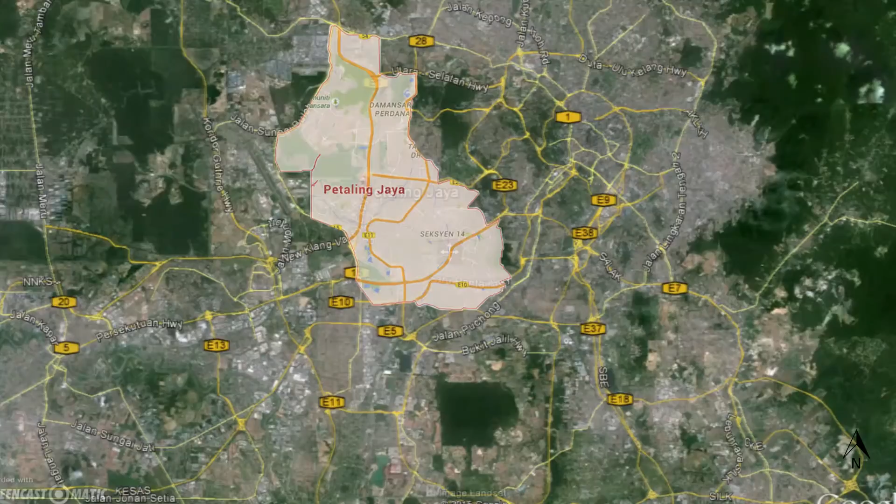Petaling Jaya, better known as PJ, is one of Selangor's earliest developed townships, surrounded by the Malaysian capital Kuala Lumpur to the east, the Gombak district to the north, the capital of Selangor Shah Alam to the west, and Subang Jaya to the south. PJ was naturally a strategic township enjoyed by both locals and visitors.

Taking a trip down memory lane, PJ was initially made up of PJ South, from Section 8 to PJ Old Town, which were established around 1953.

As Malaysia soon gained independence and started developing, the government initiated the New Town Development Projects as an initiative to improve unfriendly urban and dwelling environments.

The British urban development system and legislation was adopted into PJ, and PJ then became the first new town in Malaysia designed in accordance with British town planning principles, based on the model of a modern-day ideal city. Being such a valuable and desired location, it is hard to believe that an approximate 100 meters by 60 meters plot of land was left empty.

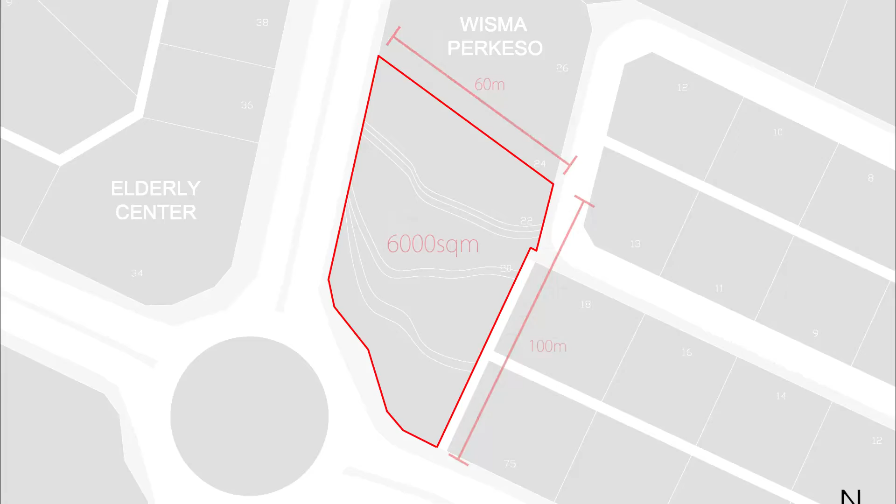To fully utilize the site to its fullest potential, necessary site info and data were collected and analyzed.

Sunpath was studied, as light and shadow play a huge role in building design orientation. Wind direction and intensity was also studied to aid passive design strategy.

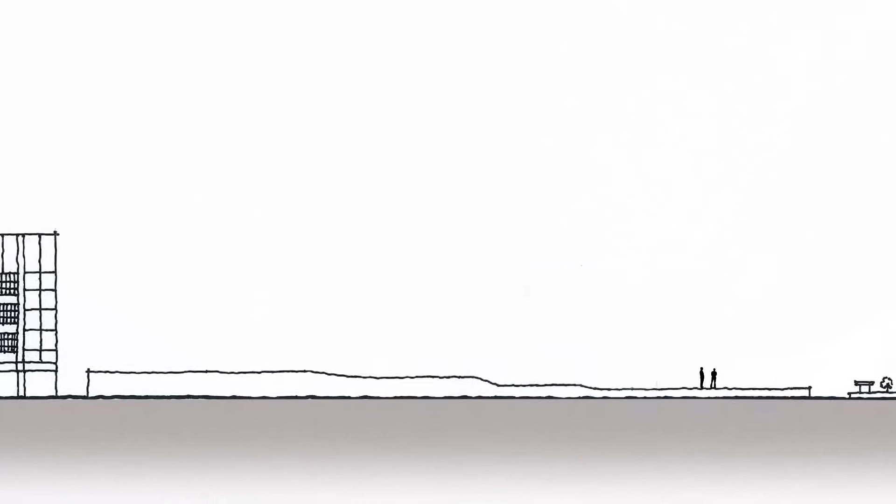Besides, the landscape itself is especially interesting as it generally has three major contour layers and possesses numerous lush and mature trees. The following trees are as follows.

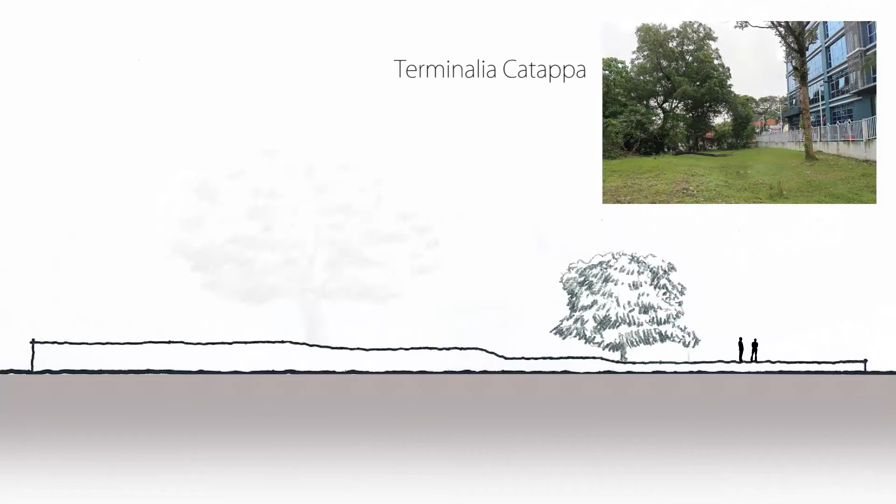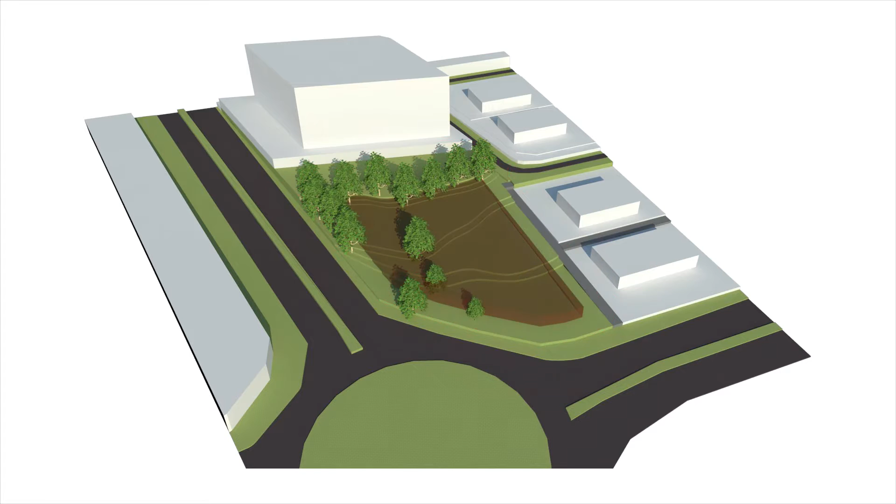According to UBBL, the building built on site must comply with a 6-meter setback on all sides. On top of that, the height of the building is also restricted to a limitation of 5 stories.

Around the site, renowned landmarks such as Assunta Hospital, Rakan Muda Complex, MBPJ Tower, UiTM, Masjid Jamek, Wisma Pekeso, SMK Assunta, and PKNS Tower are easily identified.

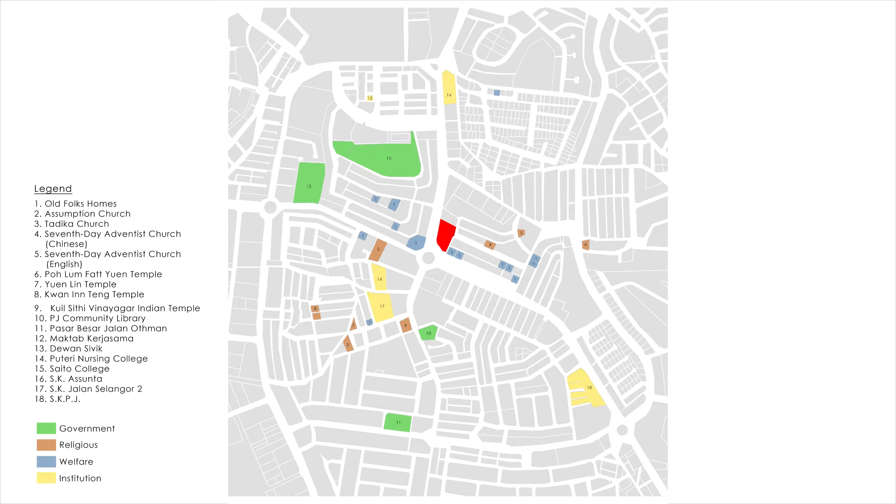Alongside these major landmarks, numerous elderly centres, schools, churches, temples, and a community library are found. All these establishments have brought about many perks and opportunities for the locals and livened up the township as a whole.

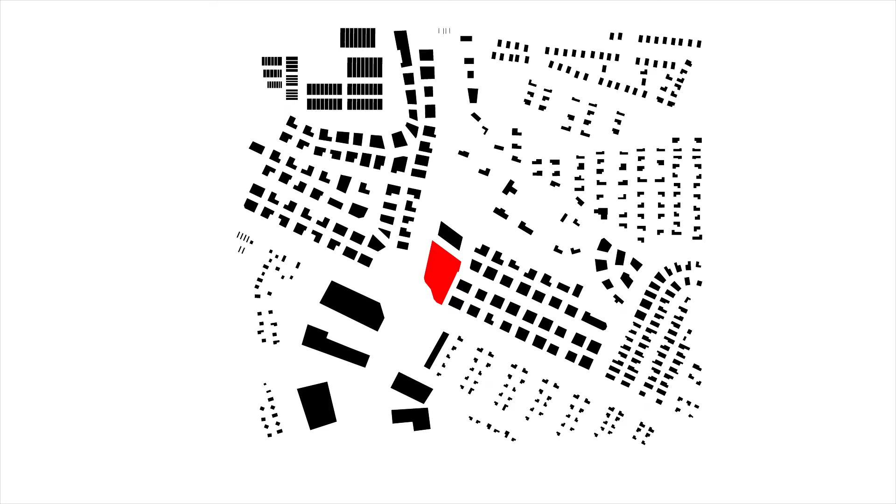Also, based on the figure ground diagram, we can see there are various voids in the area. Most buildings have extra land around them and can be considered a fairly spacious and comfortable township to live in, compared to busy urban cities like those in KL.

With all these facilities and attractions, it has definitely contributed to the traffic and affected the circulation of the area. The main circulation is primarily taken up by motorists coming from either the Federal Highway or the New Pantai Expressway, both leading towards the city centre, Kuala Lumpur.

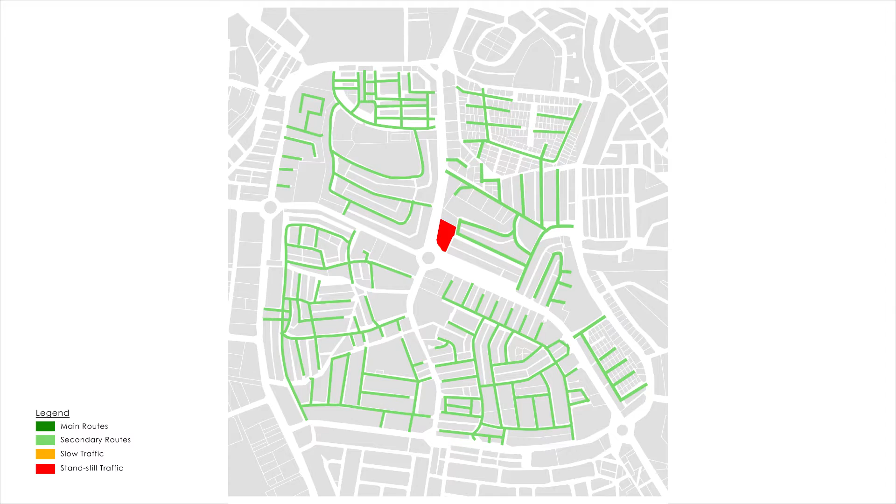Secondary circulation, on the other hand, is taken up mostly by the residents themselves, as schools, mosques, churches and temples are present. As can be expected, the traffic in the area isn't ideal and is frequently complained about by the residents of PJ.

At peak hours, 7:30 to 9:30 am and 5:30 to 7:30 pm, the traffic is often slow moving and sometimes even at a standstill.

On the contrary, the human circulation in the area can be taken as favourable, as proper walkways are available and the landscape is well taken care of. Residents do not mind using the walkways and are also not afraid to fully utilise the inner roads which form the secondary circulation.

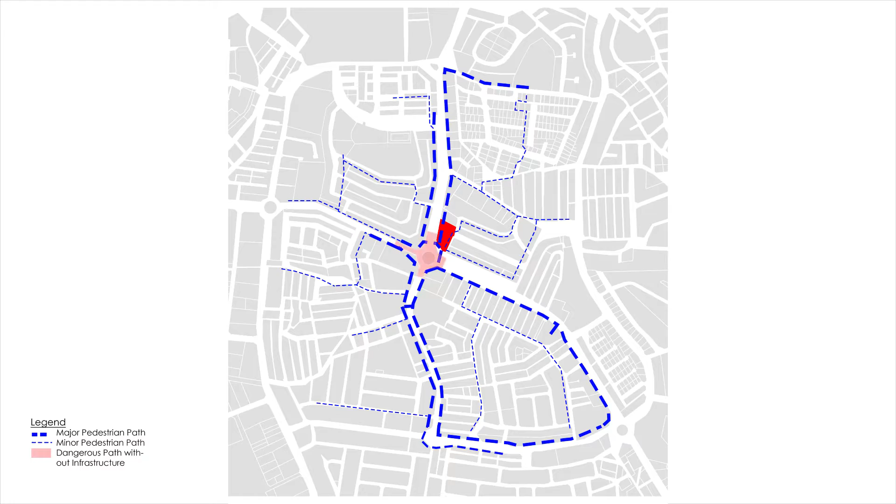The area can be said to be a relatively safe neighbourhood, as crime rates are moderate, as told by the residents. In fact, the danger doesn't come from the crime rate but the lack of infrastructure, highlighted in the danger zone where pedestrians jaywalk their way through the busy main streets and roundabout.

Besides that, there are also several transportation options available on site. Taman Jaya LRT station can be found along the Federal Highway, whereas two more KTM stations can be found along the NPE Highway, namely Kampung Datuk Harun Station and Jalan Templer Station.

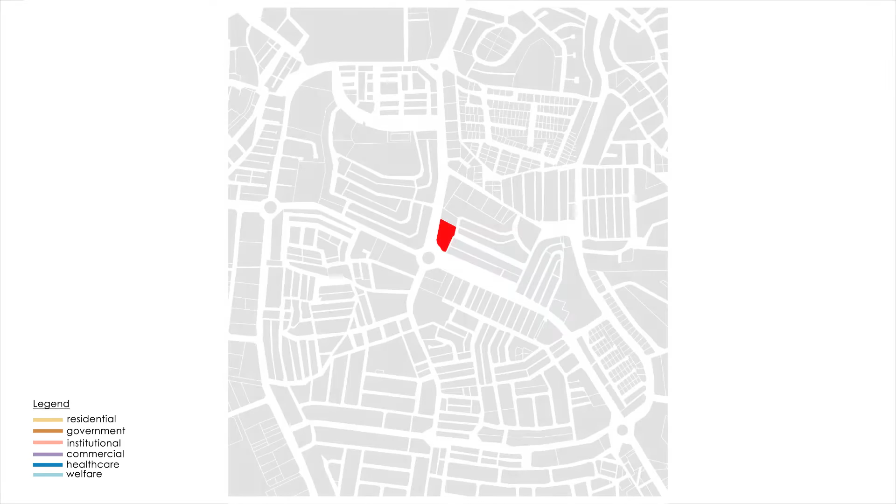MBPJ has also taken an extra step in providing a free community bus to better the existing public transportation services. With that said, through an analysis of the landmarks and human circulation, the nodes are identified, edges are formed, and districts are marked.

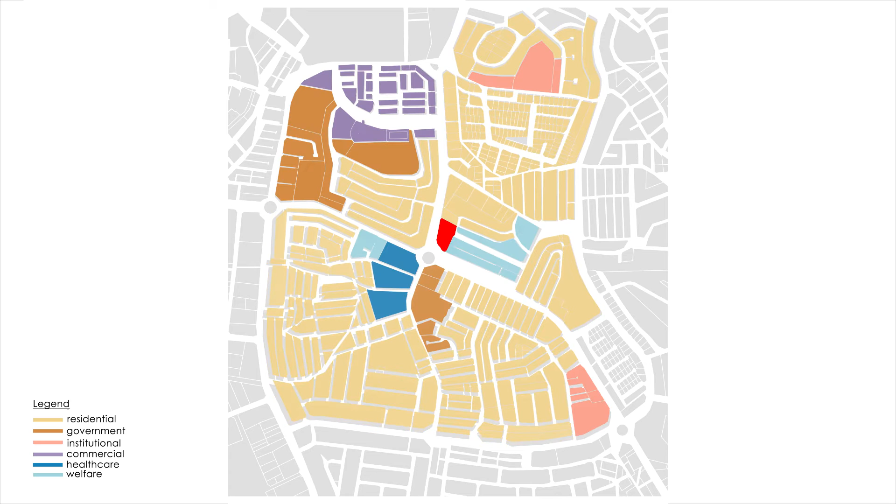Besides being strategically placed, the site is blessed with a diverse community, expressive lifestyle, and eventful activities, which is feeding the creative scene in Petaling Jaya.

To further understand the community, a round of survey was conducted. A total of 100 questionnaires were distributed to the people of PJ. The answers from the questionnaires were later collected and graphed into charts to be compared with charts by MBPJ, which was based on the entire PJ population.

Participants of the survey were mainly made out of adolescents, followed by young adults, as they were partly our target audience. In terms of occupation, it has come to be expected that it is dominantly taken up by students, followed by working individuals. Besides that, since the majority of audiences are adolescents and young adults, their opinion towards what creativity is to them is of utmost importance to our study.

It appears that both adolescents and young adults appeal to arts and craft as their source of creativity. Lastly, based on age category, participants were asked if the implementation of a creativity center was a good choice for the community of PJ. A majority of them responded favorably, with just a minor few turning down the idea.

With that said, several creative activities are found around the area, starting with one of the major landmarks identified earlier. The Rakan Muda complex provides all sorts of sporting facilities ranging from casual sports like basketball and futsal to extreme sports like BMX and rock climbing.

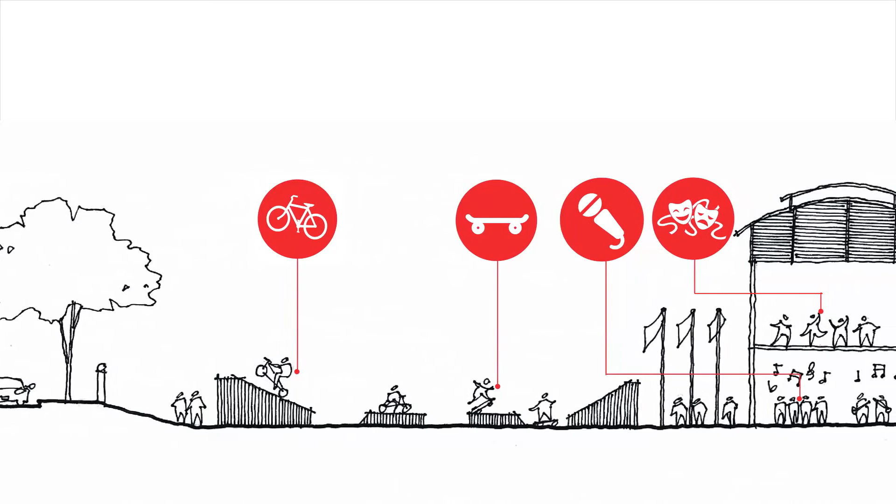Besides the various sporting events, Rakan Muda also supports creative activities like traditional dances, contemporary dances, music performances, and also creative sporting performances. Being a healthy society, the community also loves to cycle around the neighborhood.

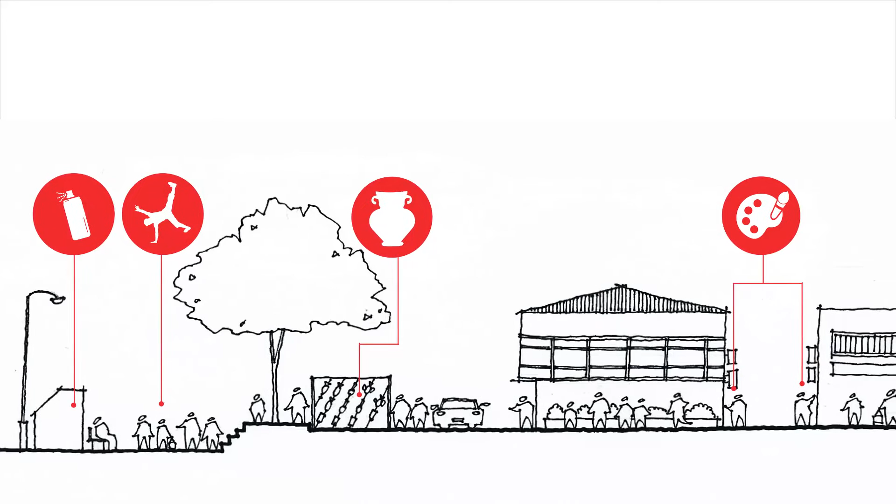Furthermore, street art is among one of the activities found in PJ. Being a community that is expressive and dares to speak out for their passion and talent, the community is not afraid to take their talents to the streets with approved graffiti, display of traditional handcrafts, and also street-side performances, which normally happen near the MBPJ Tower due to the nearby design colleges like Saito College and UITM.

With the operation of numerous schools in the area, it has become one of the main sources into nurturing the youth's interest and talent. These existing schools, particularly SMK Assunta, provide classes and after-class curriculum such as stage drama, musical bands, handcrafts, and art lessons.

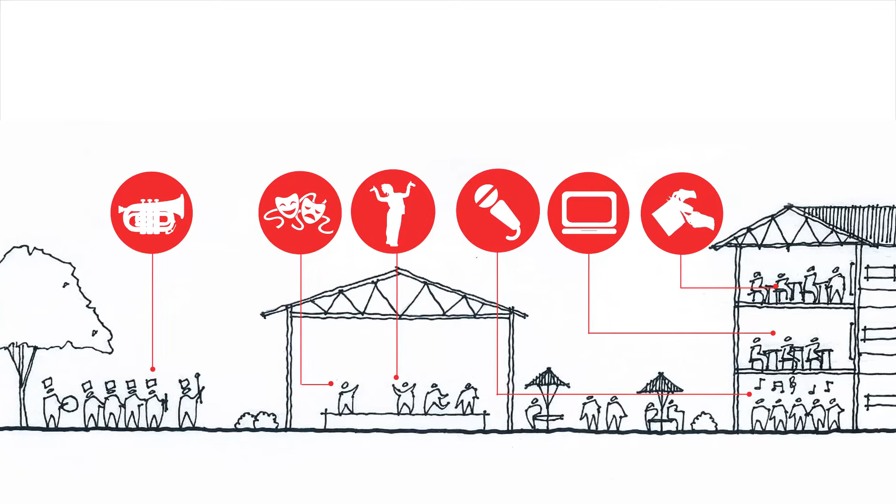On top of that, schools are also starting to promote creative art that are digital-based. For instance, filmmaking, digital illustrations, and also music composing.

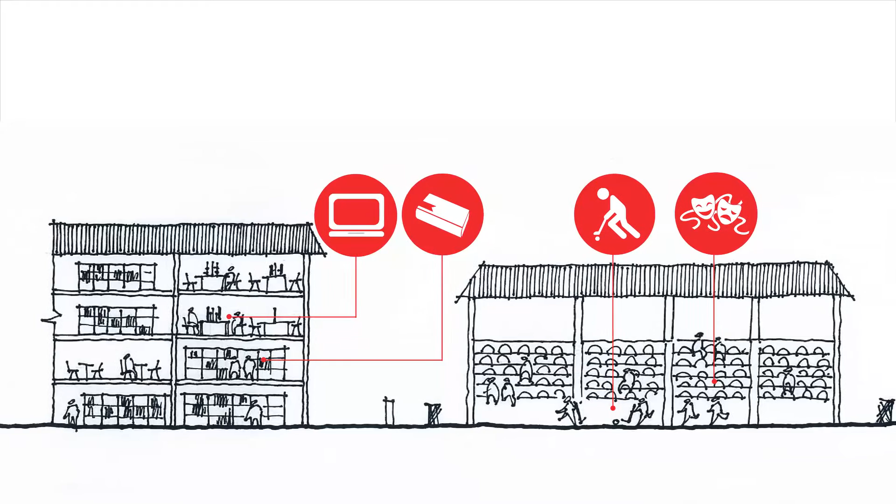The library is also one of the hotspots within the area. Community of all ages are welcome to carry out a variety of activities there. Retired elderly are often there for the rich reading material, and the younger ones can fully utilize the library's multimedia facilities for school projects or for self-interest in digital content creating.

In general, PJ Town is blessed with a wide range of creative talents, just yet to be discovered by the public. These creative activities can be listed as arts and craft, performing arts, and lastly, digital arts.

On the flip side, these existing creative activities do come along with certain issues. As lively and active as the community is, some of them go elsewhere to exercise, as facilities provided in Rakan Muda are not well maintained, especially the rock climbing facility. Bicycle paths are absent as well, making the safety of cycling around the neighborhood risky and dangerous.

Besides that, the street performing arts scene was sometimes taken for granted as well. Illegal graffiti can be found in quiet parts of the area, and street performers are not exposed to the right audience since the street was not a dedicated performing area.

In terms of the rich variety of art forms carried out in the schools, they fail to provide the much needed audience for wider exposure, as the schools seldom bring students out for competitions or invite visitors in to enjoy the performances.

Last but not least, the digital art scene in the area is still not mature, thus exposure and guidance is very important. The current technology equipped in schools and libraries is dated and in need of an upgrade to stay competent and relevant for today's media use.

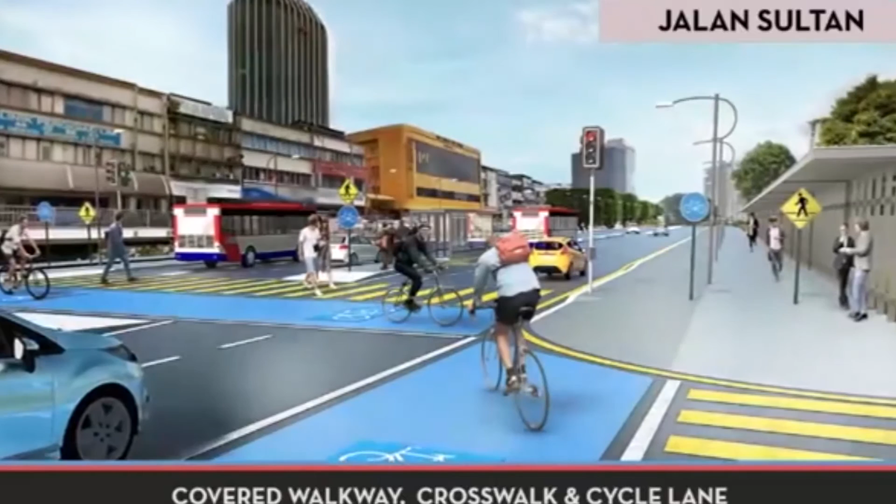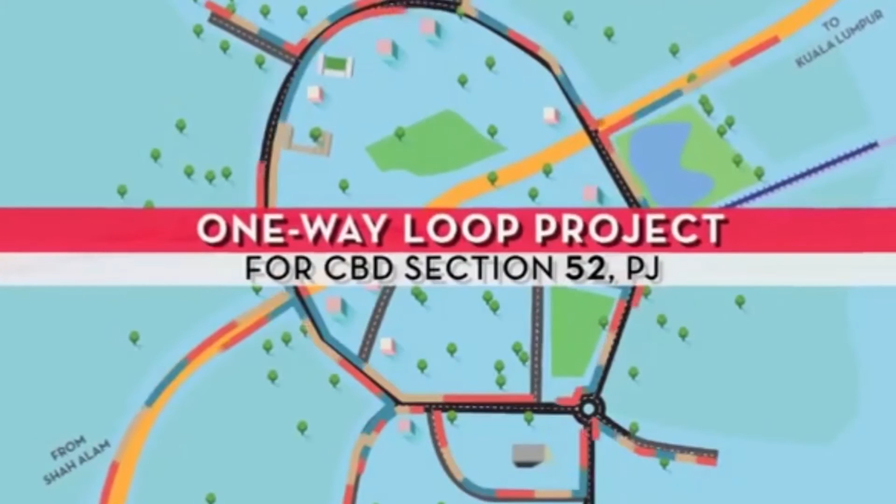In efforts to solve some of the issues stated, MBPJ has kick-started the bicycle lane project and the one-way loop system for the main circulation in PJ. Unfortunately, these efforts only solve the road safety issue and the dreadful traffic in PJ. Here we look at some foreign precedent studies to learn how we can attempt to solve the remaining unresolved issues found on the site.

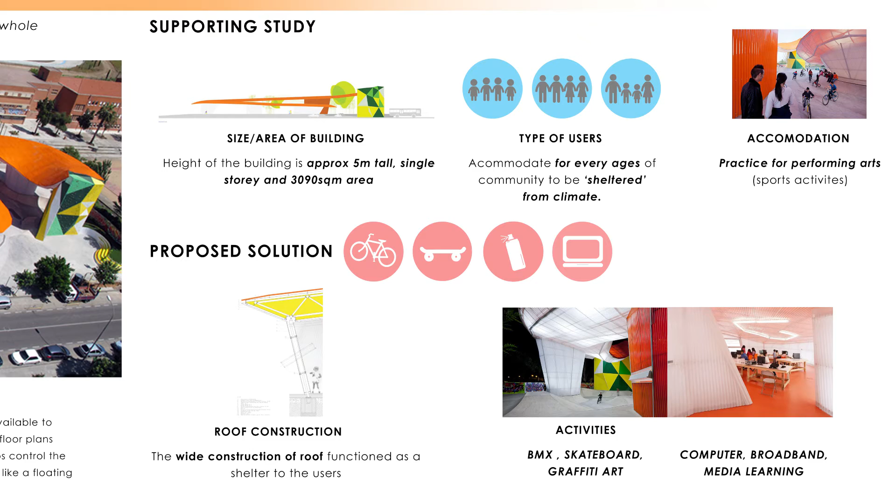Firstly, the Merida Youth Factory was designed as a large canopy to protect users from rain and sun while they participate in activities below. Based on the supporting studies, this building is approximately 5 meters tall, a single story, and 3,090 square meters wide. Referring back to our given site in Petaling Jaya, the preferences do meet the building height requirements and it covers our 5,500 square meters of the site area.

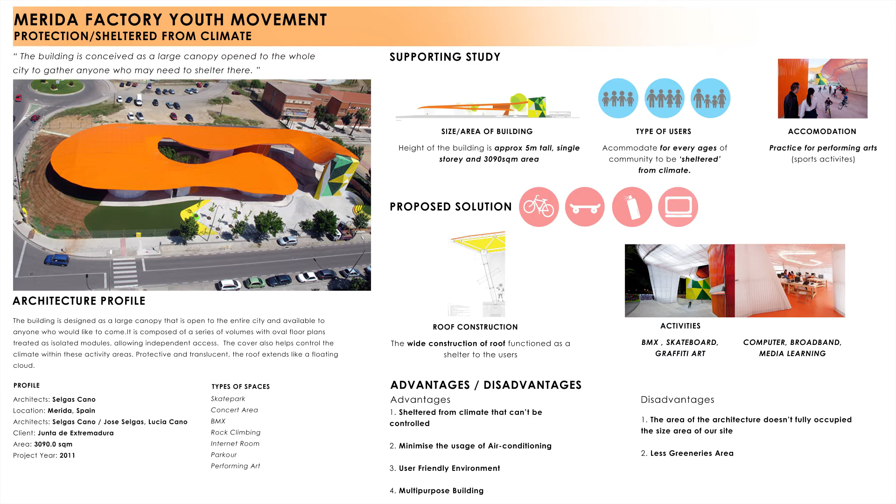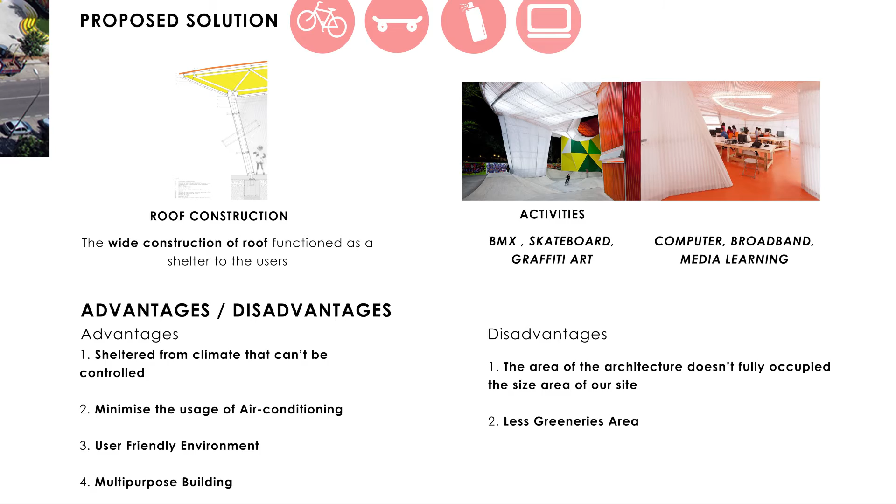As an enhancement of our given site, this building attracts people of all ages and serves a variety of facilities for users. To conclude, the main advantage of this case study is that the shelter system is suitable for our site's climate, which minimizes the usage of air conditioning and manages to serve a variety of use facilities in a safe environment. As for disadvantages, it is quite small for our site and doesn't emphasize landscaping and greeneries.

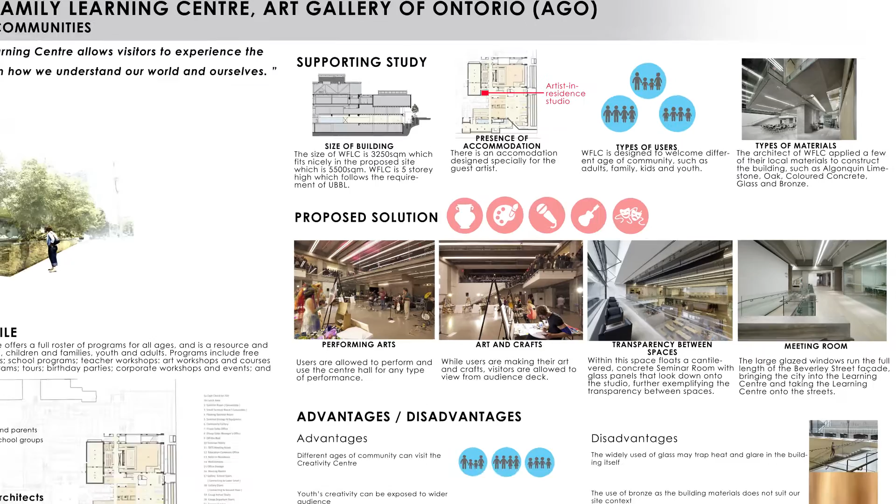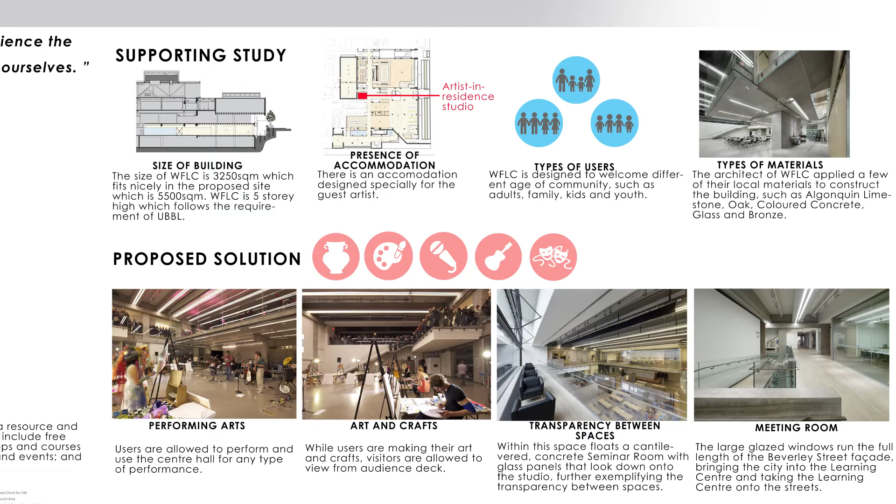Secondly, the Weston Family Learning Center offers a full roster of programs for all ages. The supporting studies show that the building is a good example that fits nicely into our site in Petaling Jaya. In addition, the Weston Family Learning Center can be considered vernacular architecture as the construction materials are locally found, such as Algonquin limestone, oak, coloured concrete, glass and bronze.

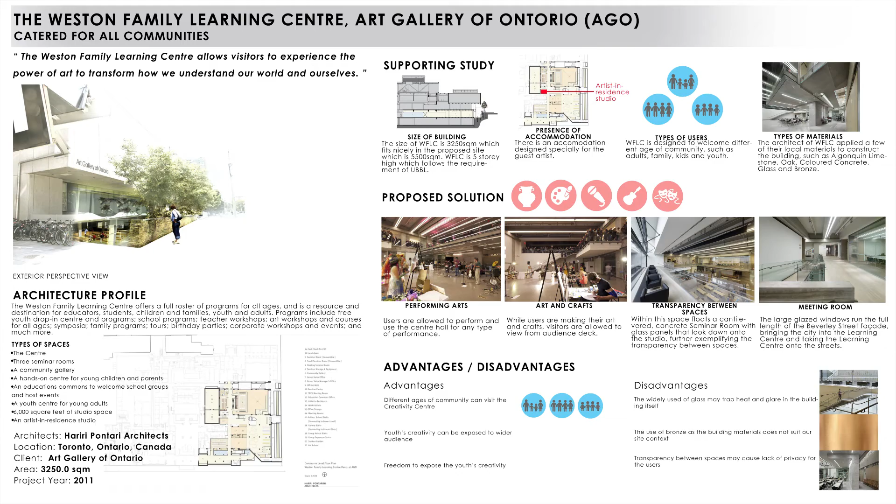Nevertheless, the main spaces inside the building are the proposed solution highlighted to cater for all communities. There are performing arts spaces which allow users to perform and use the central hall for any type of performance. Next, the interaction between the audience and the users is visible in the arts and crafts space, as visitors are allowed to view activities from the audience deck.

Same goes for the seminar room, as the space is cantilevered, finished in concrete with glass panels to look down onto the studio, further exemplifying the transparency between spaces.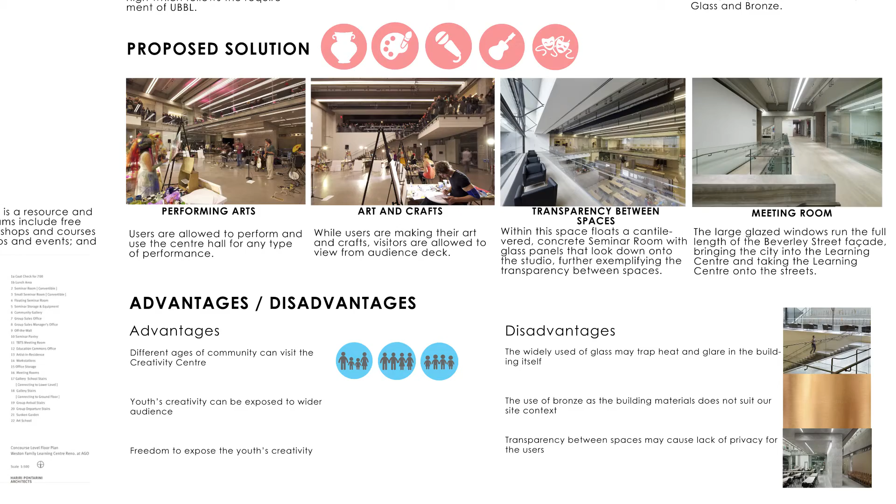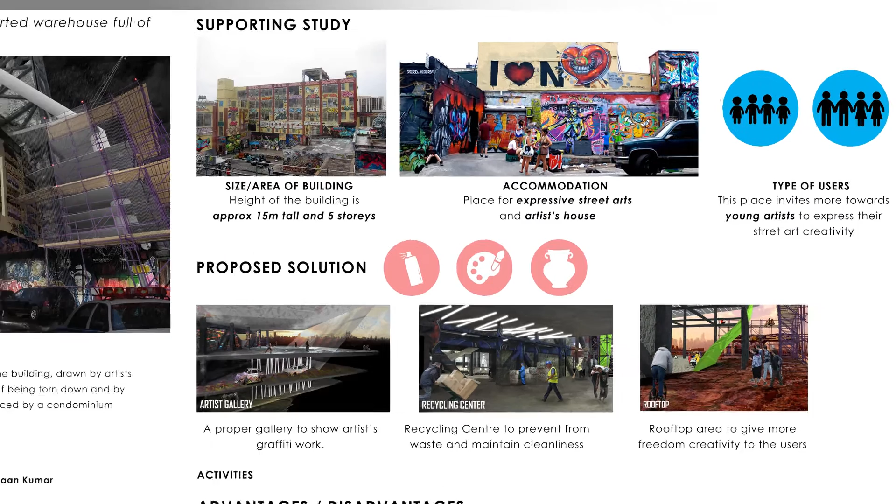Finally, 5Pointz Aerosol Art Center is living proof of legitimate street art in New York. This building was a living collage of graffiti art covering a converted warehouse full of art studios. The place is fully capable of accommodating expressive street art and artists' housing. It also targets more towards young artists, to express their creativity and continue the legacy inside.

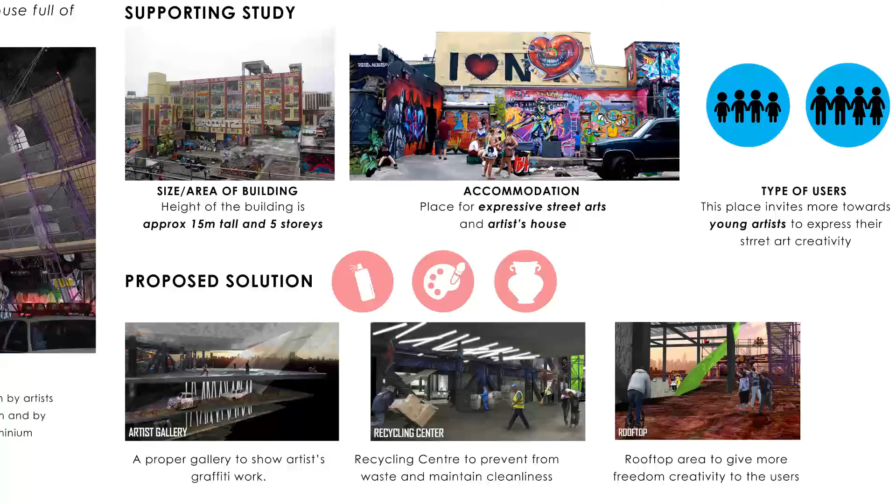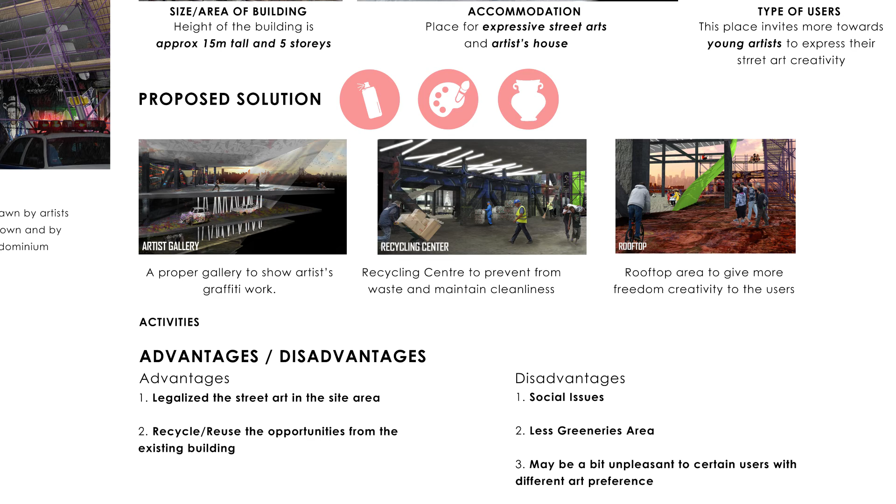Last but not least, the advantages are the presence of a dedicated space and legalized street art activity. This building also provides the opportunity of recycling and reusing to produce more creative ideas and content. As for disadvantages, social issues may happen and might be uncontrollable since full creative freedom is granted to the youth. It may also be a bit unpleasant to certain users with different art preferences and perspectives.

All in all, we believe that no one should be limited to what a creativity center really should be. Activity suggestions act only as a guidance. Likewise, how we are trying to suggest ways to nurture the potential young creative talents in PJ, our final verdict will still be based on our very own perception of creativity, and that's where the real magic happens.

Magic! I can show you the world, shining, shimmering, splendid. Tell me, princess, now when did you last let your heart decide?